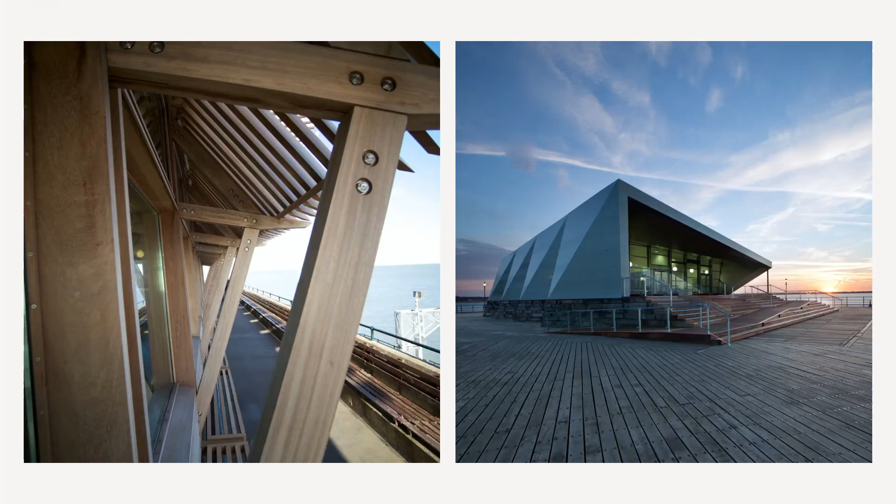This was labelled Project Innovation, and then I found there were two of my projects on the agenda. So I thought I would do a little preview of what those were.

So we can call it projects on piers. These are two piers on the coast of England. The one on the left is in Kent, and on the right is in Southend, which is actually on the south end of Essex, not the south end of England. Piers exist as a way of getting beyond the tide. It's quite tidal in the UK. In the case of Southend, there's a mile of mud in front of the coast at low tide.

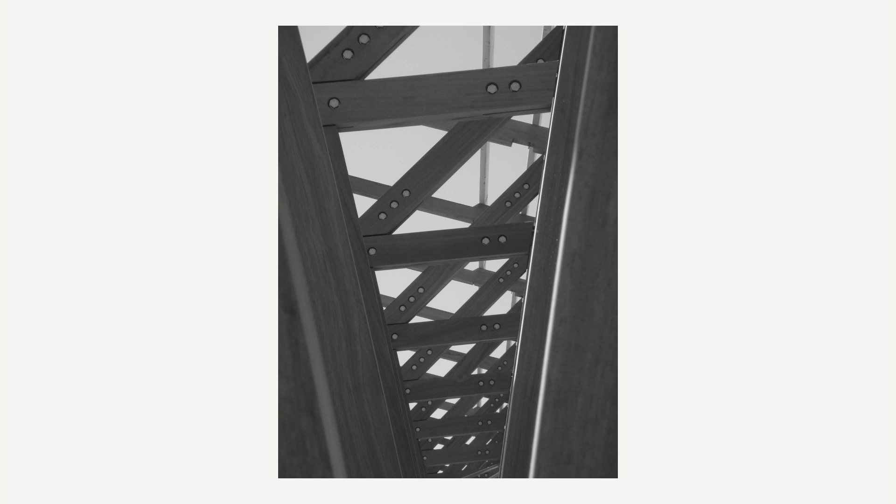What these give us is a challenge about how to build in the sea, but on these often rather rickety structures. This was done in the 1950s, and what that leads to is a different approach where the structure starts becoming really influential in the architecture and the method of construction.

This building was made in a hardwood called Iroko, and became a portal frame that defined the whole building. This is with an architect called Niall McLaughlin, who's based in London. But this idea of the architecture being generated by the structure, or the structure not really being structure but being part of the architecture, is something we're always trying to achieve on these architectural projects.

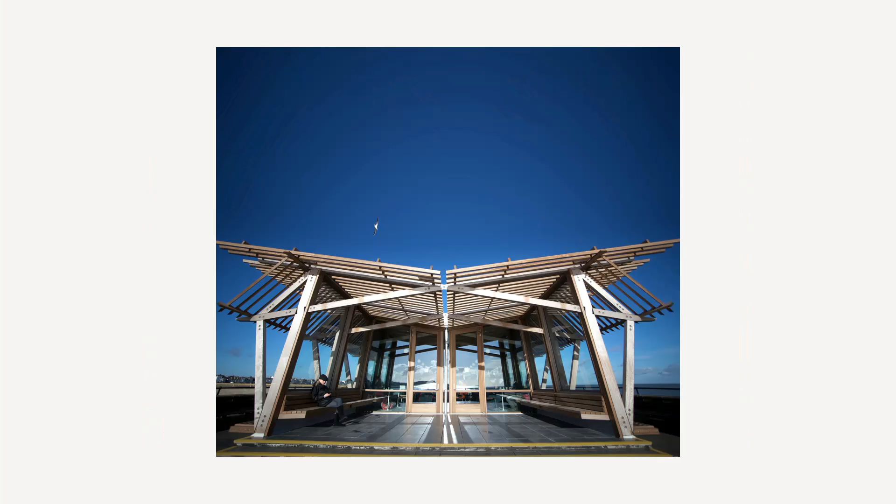Here we have the constraints that the material gives us writ large in the way the portal frame is designed. We have these short sticks of Iroko, which is the kind of lengths it's available in, and then stainless steel connections - this idea of triangles and stability and structural permanence in a harsh environment.

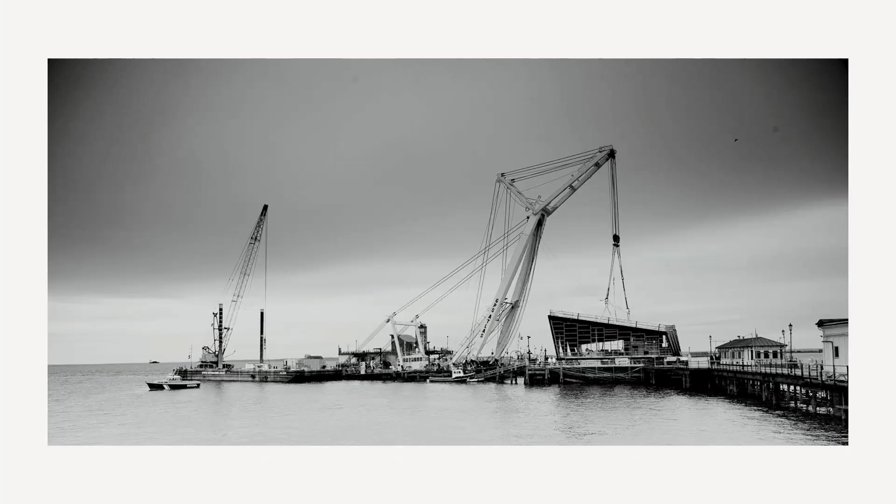So that was Deal Pier, and then back to Southend. That's the mile of mud, and the actual method - I've been talking to some people here involved in oil rigs, so I thought this was quite novel, building a building somewhere else and taking it to site.

That's what we did here. So you have this situation where your building is an object that you transport around, and you realise how much we're constrained by lorries and the sizes you can transport on the road. That didn't apply here, and we have this building that's 1 mile out to sea at high tide and in the mud at low tide.

This is a coastal project as well, and this was really one of the first projects I did about 20 years ago. We were on this 1994 to 2054 timeline, and you're 30 - I'm probably about halfway through my life in terms of that. I started working in '96, and in 2054 I'll be 80 if I make it that long.

But that way of staging your life and thinking about what you were doing in, say, 5-year stints - in this 5-year stint, we were thinking a lot about how to make things, and this was an earlier stage in digital design and the ability to model things.

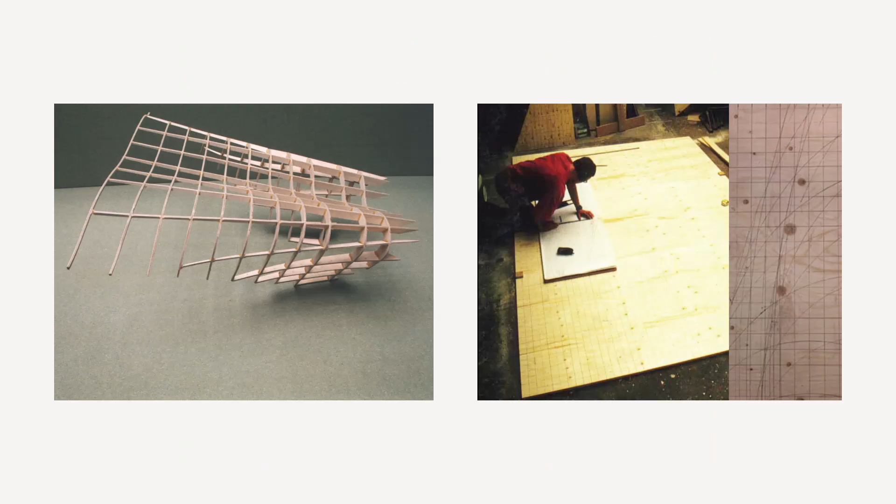So this bandstand came along, again with Niall McLaughlin, who we did the first cafe on the pier with. What we did here is really take responsibility for thinking about how something's made and built, exactly how it's done, and thinking like builders, which we do as engineers, but sometimes we need to do more.

This was, again, an era before CNC existed in the architecture engineering industry. So on the left is a model of a wooden framework. This canopy is seen as a boat and seen as something made of wood, and then skinned in fiberglass.

But how to do that - the person on the right is drawing curves over the surface of the plywood, and then they're actually cutting those out by hand on a jigsaw.

Time hasn't been kind to this. This was about 9 years ago when we thought about refurbishing it, but the builder who built it originally, Michael McHugh, he came with my drawings, which are 1 to 5 CAD drawings printed on 2 meter long rolls of drawing, with the precise coordinates of each bit of those curves.

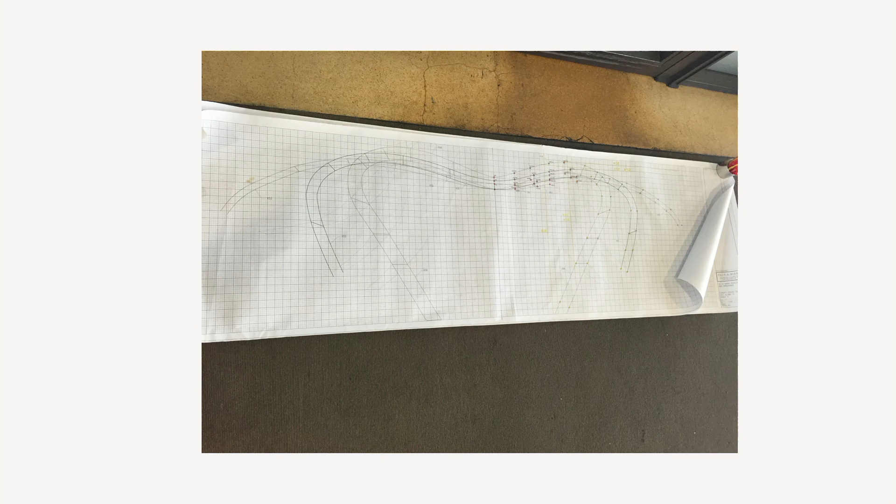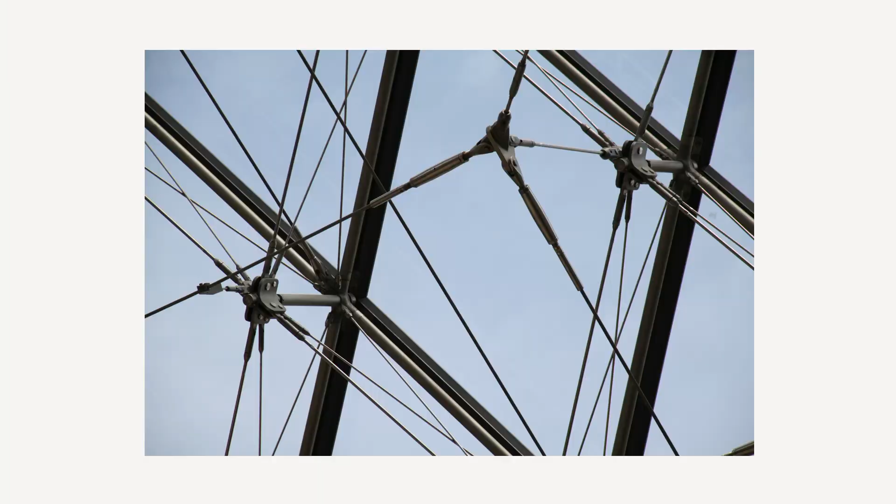I think for me the fascination was how this structure that looked so completely transparent could hold up all that glass and be such a monumental thing. So that idea of transparency and almost not being there as a structure has intrigued me ever since.

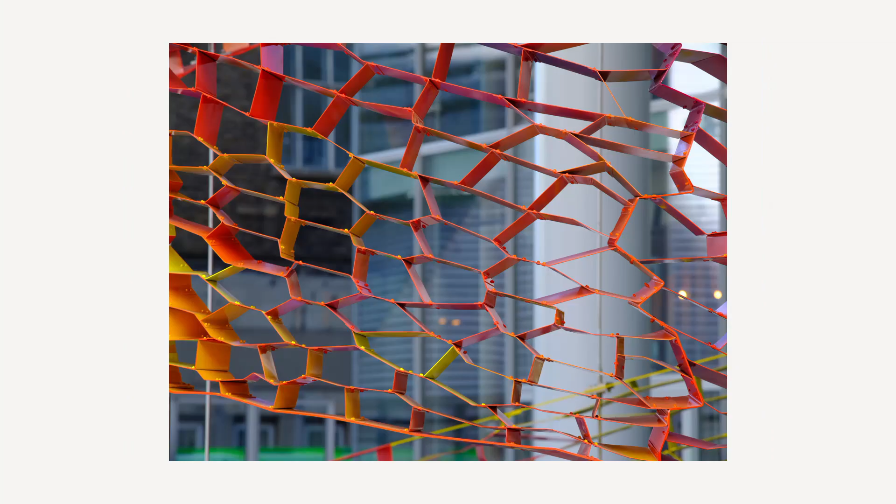So we've been doing this in artwork and other kinds of architecture, and that's a big driver in how I'm seeing the world in terms of designing buildings, but also designing a lot of artwork. In that, we're really making the artwork be the structure and be transparent, keeping that idea of extreme simplicity and not being heavy-handed as an engineer, but being in the background and making what's there structural.

So that idea of engineering - we're a technical profession, but we're also an artistic profession in some way. If you think of the engineering of art and rearrange those words, you have the art of engineering, and you realize the challenges we have are hugely creative and hugely appealing. And if we see it like that, we have this huge challenge that we've been talking about for the last 2 days. So that engineering of artwork is what I'll talk about in a couple of these projects.

I think I've got 3 to show you, maybe 4. This was the first one I did in Bristol. It's called a Millennium Beacon. It was done in 1999.

The idea here is literally like a giant trash can. It's lit from below, with an artist called Martin Richmond. But the idea, what I was trying to do here, is not have a column, but make the whole thing the column. It's made of very thin, perforated stainless steel, 1.5 mil thick. It makes a good seagull seat these days.

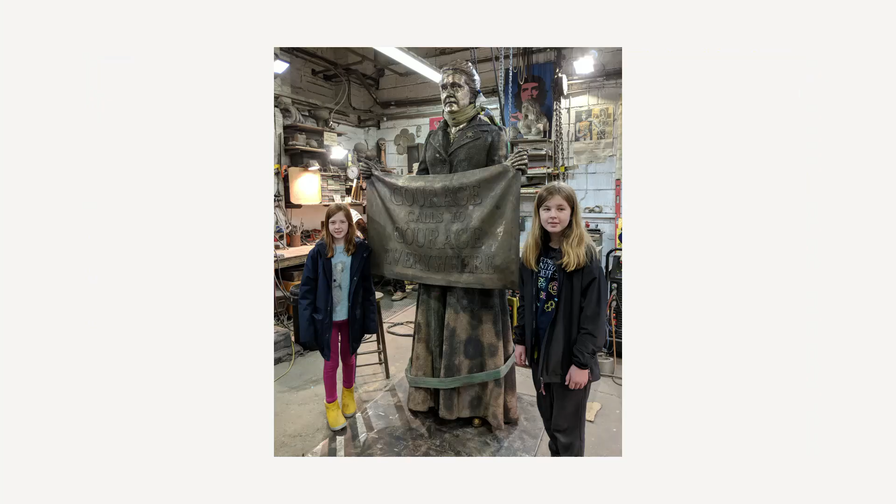Part of the artwork we do is statues, sometimes of footballers. This was a bit more serious - this is Millicent Fawcett, who, when this was erected in 2018, was the first female statue in Parliament Square in London. She was a suffragist, campaigned for women's suffrage, universal suffrage. And my kids have been long used to being dragged around art foundries and other kinds of fabrication shops, seeing things being made.

But in doing this, we're making this material structural. We're not imposing a structure on it. We're thinking about how she holds the banner, how we reinforce those fingers onto the banner, having stainless steel pins welded in. This approach is about trying not to be there—no artist wants you there as an engineer, they just need you. We have this role where we're the only real building professional necessary, and people can't do without us for safety.

This was back in Bristol, and more recently with Marc Quinn. This is the Colston plinth—Colston was a slave trader who was pulled off and thrown in the harbour. Marc Quinn reproduced this figure, a woman called Jen Reid, who stood on the plinth during a protest. It's only made of resin, but the base is 200 millimeters thick of steel plate, making it heavy enough to be stable without being fixed to the plinth, so we wouldn't be charged with criminal damage. It lasted a day before it was taken away.

So this idea of art is that often you're taking something that's low value junk and turning it into something precious through the thought you put into it. Some thoughts on that.

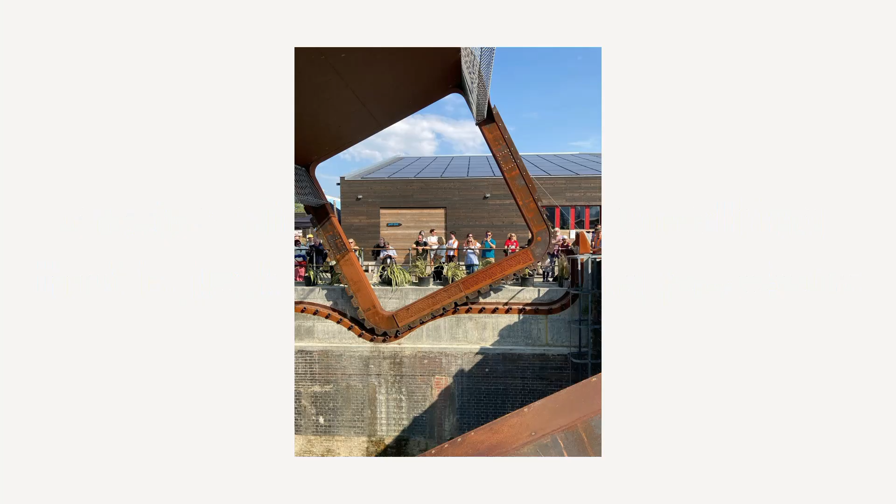So, I know we're not artists, but can we think of ourselves, and what we do, as turning the materials we work with into something precious—using them sparingly and thinking carefully about exactly how we place them and how we leave them in the world? It's something that challenges me all the time.

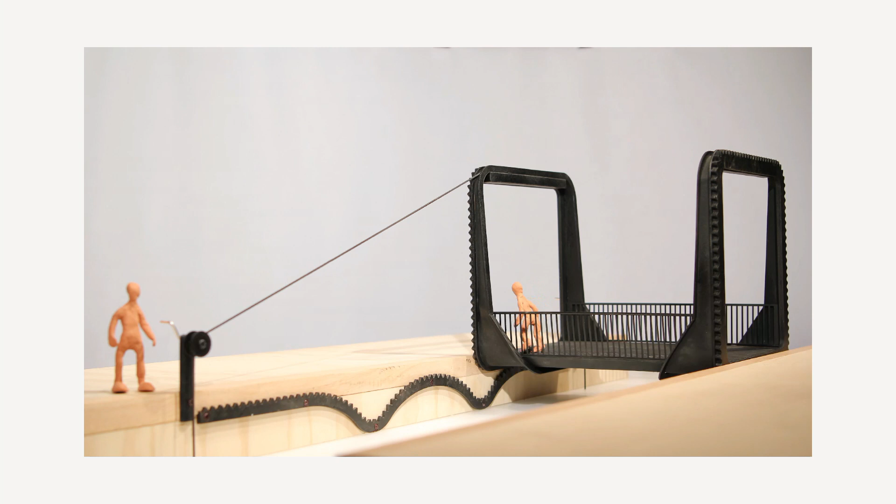So I'll do some projects. This is, I think, the one that got me the gig coming here—Rolling Bridge. Omar was a judge for the iStructE, and this won an iStructE award last year, I think. It works like this: you walk across, you say stop—there's a boat coming, wind the bridge please.

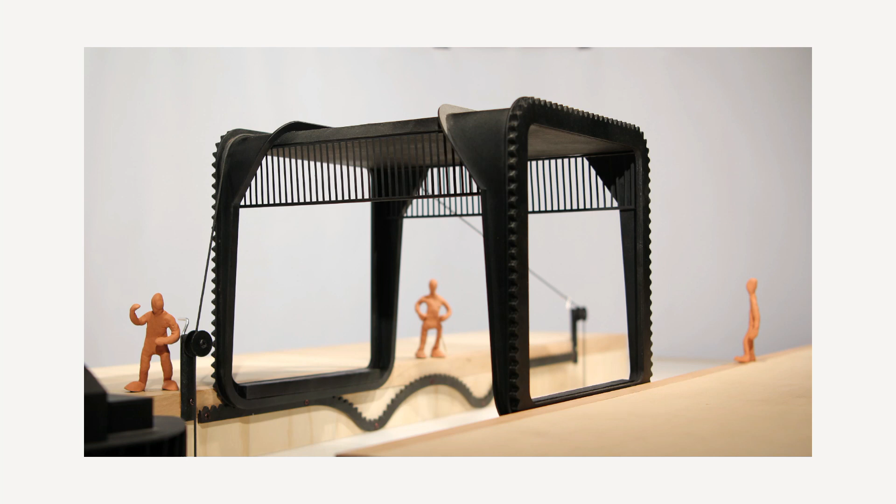It doesn't happen this quickly. Boat comes—very relaxed, boaters not rushing, it's a canal boat so nothing moves fast. Wave—you have to wave at people on boats, it's the law in the UK. There we go, and it's here. Have you seen EastEnders? This is my version of EastEnders.

The mouth of this dock is where our bridge is, and the idea emerged 10 years ago with an artist called Thomas Randall-Page, who I met at an opening of another art show—which shows you should always go to openings. He had this idea, manifested in that animation, of a bridge that rolled on a curved track to open, flipping over to allow a boat to go underneath.

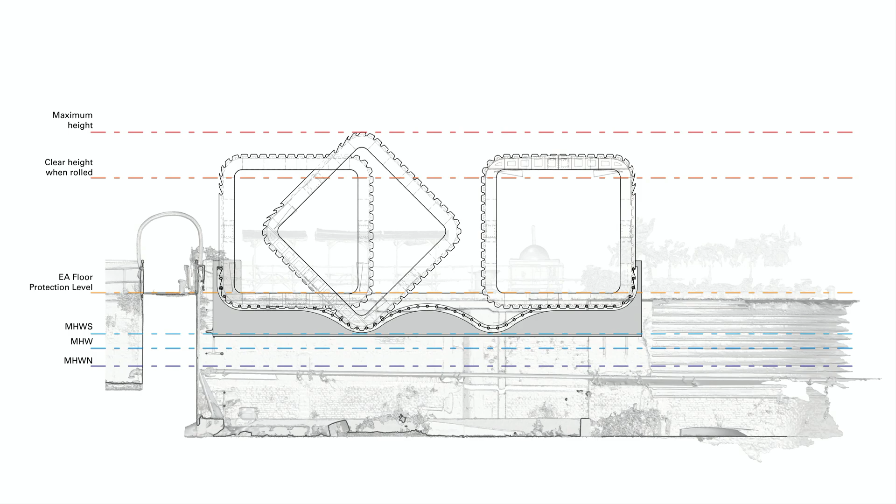That idea of knowing and not knowing yet is, I think, what we all take for granted perhaps, that we start something not quite knowing how we're going to finish it. And having that confidence to build and to not be freaked out by that.

And this maths that makes this bridge possible was developed by a guy called Stan Wagon, who's actually still alive. We did a podcast with him, and he actually wrote a paper about our bridge. It's one of those things where you have this idea in the 1960s, and then 50 years later, someone does something with it, other than make tricycle tracks.

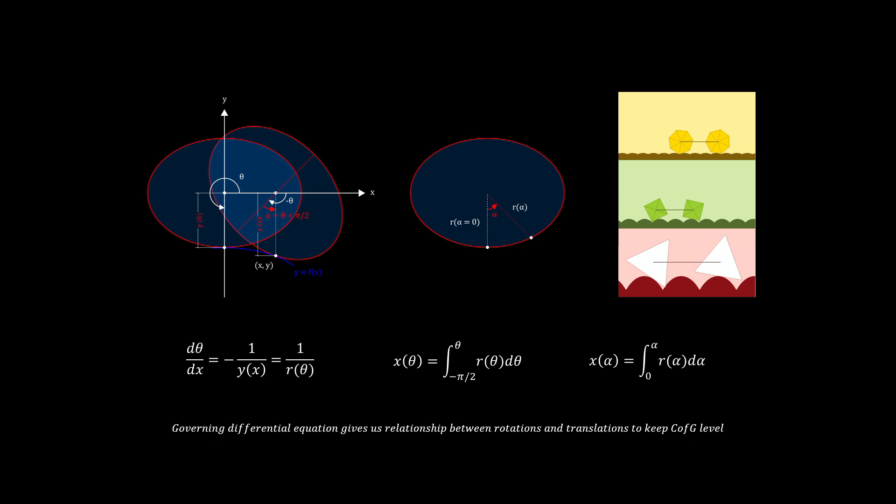So as I say, you can do it for different shapes - you always get a catenary. But what we had with our one was we had round corners, because the architect wanted to make it look gentler, which it does.

But this led to literally a Boxing Day maths nightmare, where they were cleaning up from Christmas dinner and had a message from the fabricator saying we can't make the length of the track match with the model that we have in the computer and the maths.

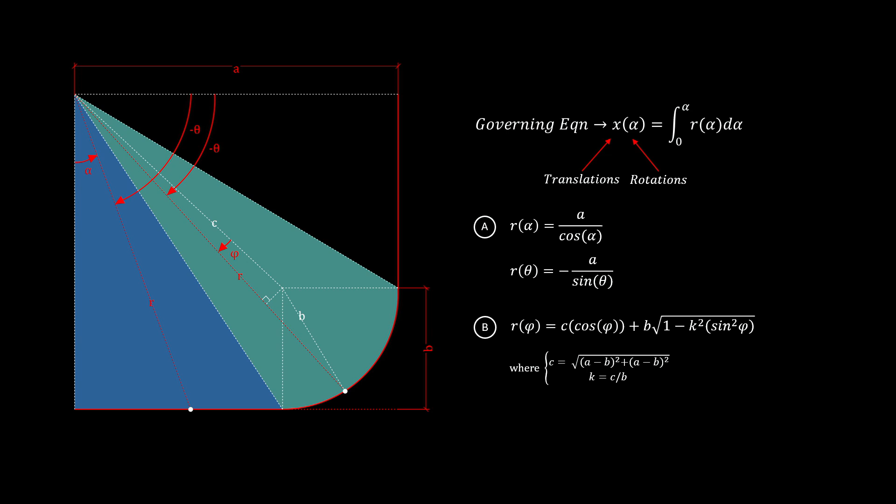What we hadn't realized is that in doing these corners, you have to have an indeterminate equation - an elliptical integral, which I'm not going to try to explain. You have a function that you can only iterate rather than get a complete result for. So luckily we have Grasshopper.

Grasshopper, for those less familiar with it, is a scripting software that goes with Rhino, which is a 3D modeling software. What's amazing now compared to when we started doing this, is that we have a common software, which seems to be Rhino, that most people who do this sort of work use, and the fabricators can understand. So we have one piece of software that's customizable, adaptable, and programmable by people.

So this is our bridge moving through space over this slightly modified catenary track. The modification is in the curved corner.

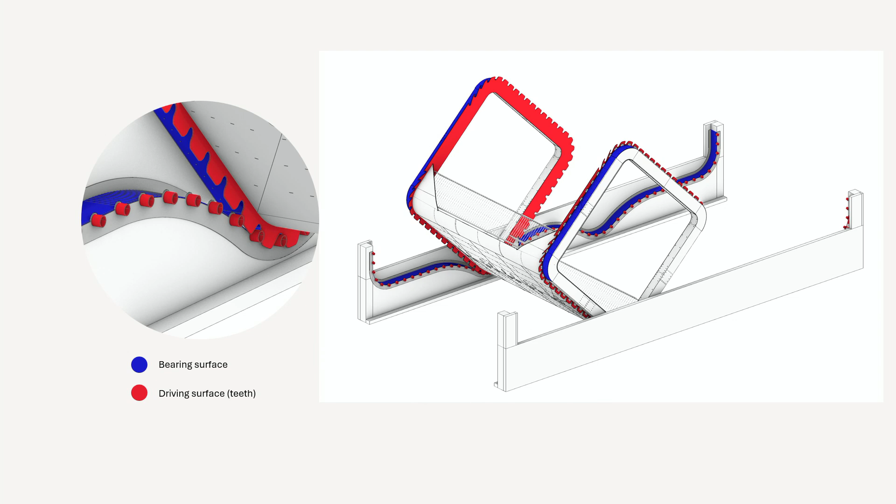And then you also realize that you don't know much about wheels and traction. So we had a mechanical engineer who helped us, and what he said was that the driving surface and the bearing surface, or the cog surface, have to be in the same plane, otherwise you get friction between the two. So we have the blue bearing surface and then the driving surface of the pegs, and they have to stand up so that the center of those circular pegs is at the same level as the track.

Once you've done all that, then there's more maths, and there's iterative GSA results. GSA is the analysis program we use for structural analysis, but also plugins to Grasshopper, the Rhino program - one called Karamba, so we can iterate lots and lots of angles of this bridge very quickly and work out what the relative forces are, how the bridge moves, so the center of gravity stays straight, so you're not lifting the bridge as it rolls along.

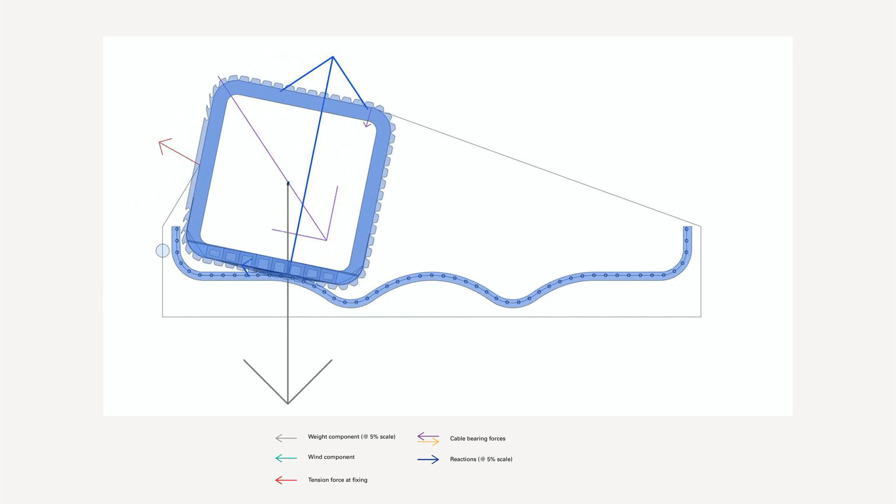But the actual friction, the impact of the wind on the deck when it's elevated, all of those kinds of things determine how hard it is to pull it, and how powerfully you need to pull the cable.

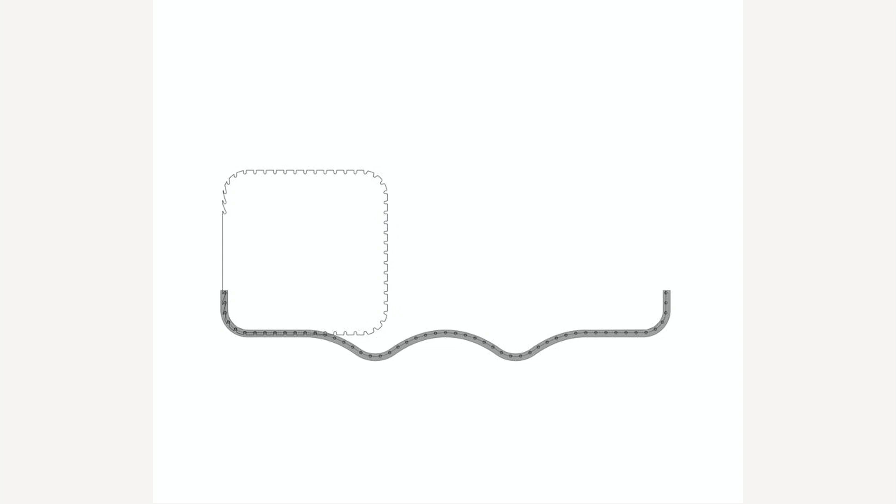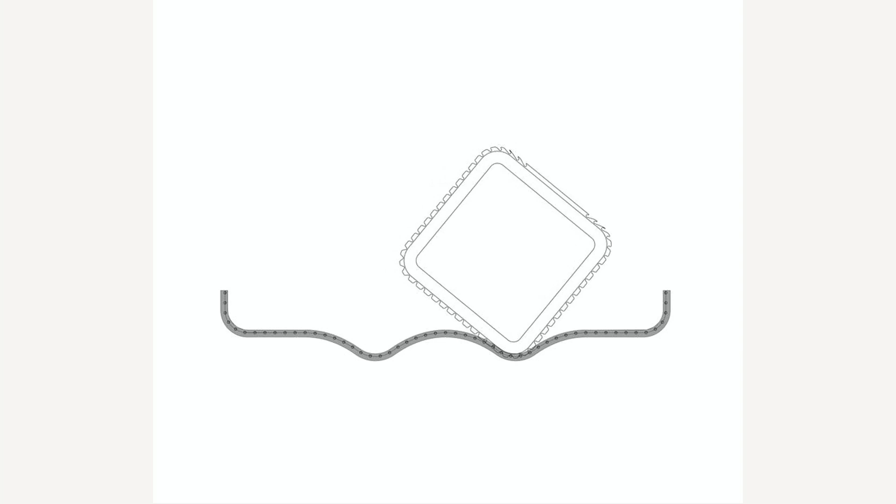So it's that, and then actually working out how do those cogs that we had on a very simple kind of tooth on the MDF model we made, how do those actually need to be? You end up having to iterate and twist your track over the perimeter teeth, and what you find is that they're all completely different depending on the angle that the bridge comes down onto the track. That process gives you this, which made a very good Christmas decoration last year on our Christmas card. But what you see is at the ends, the actual pegs come in at a very shallow angle of attack to the thing, whereas in the middle they're much more perpendicular.

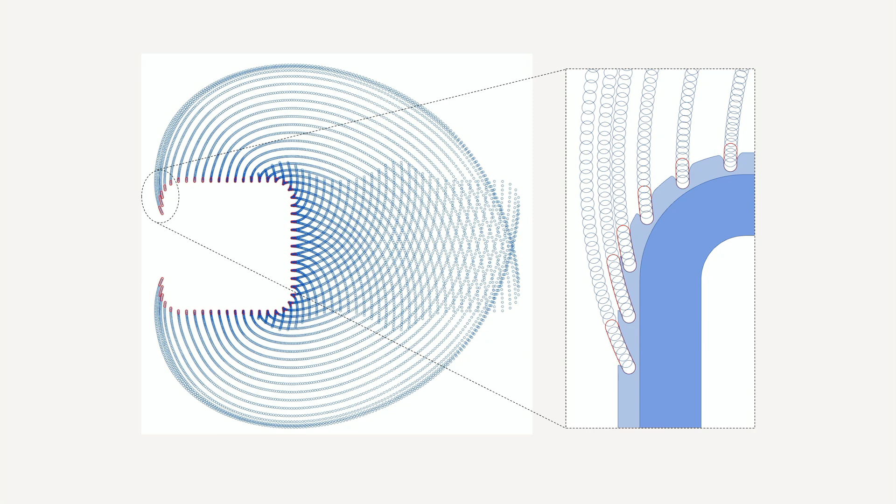So you have this very customized piece of steel, and then you can see here this is the bridge being built, and you can see how these things all line up. I mean, there's a whole lecture in this bridge about how things didn't quite line up, and did eventually.

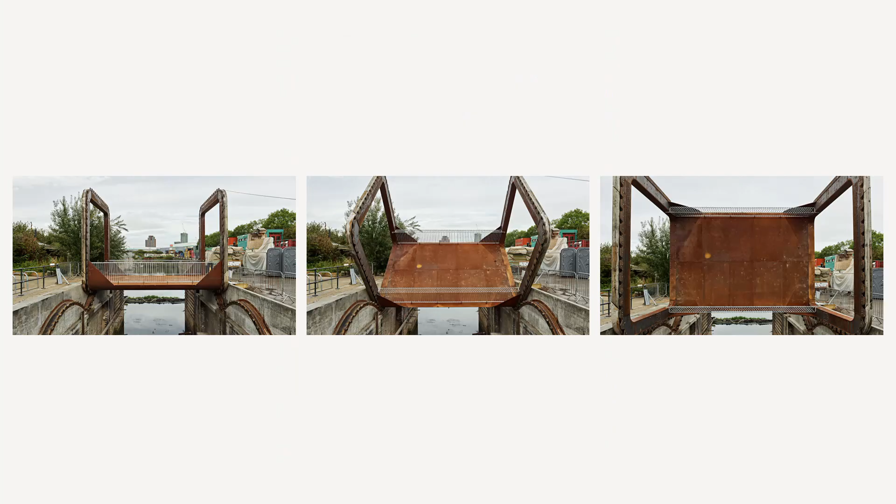But this idea of moving such a large object as a single thing - it weighs 13 tons, with the counterweight at the top, within the top of the portals - and then the deck being made absolutely as light as possible, so holes in all the stiffeners, just to balance the weight, so the centre of gravity is in the middle of the square.

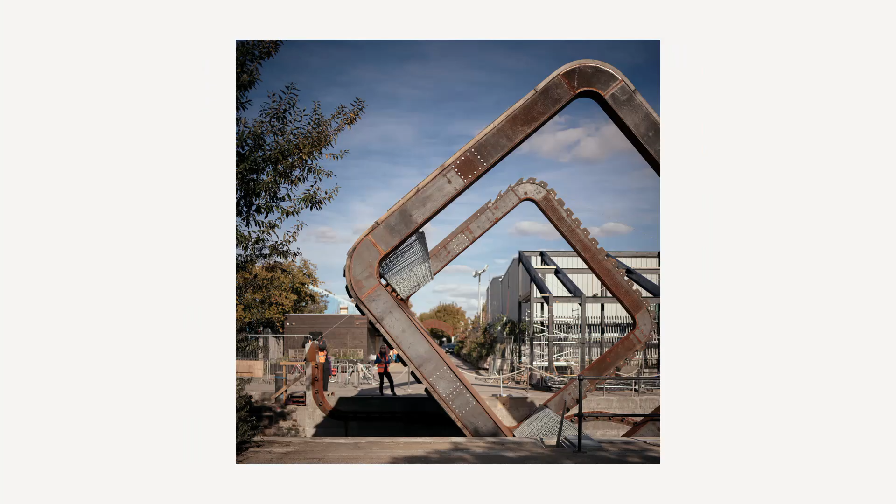So there's our weird teeth. It looks a bit like a sunken ship, you know, when you see a lurched, sort of tilting ship, and it makes you feel a bit ill. It does for me anyway.

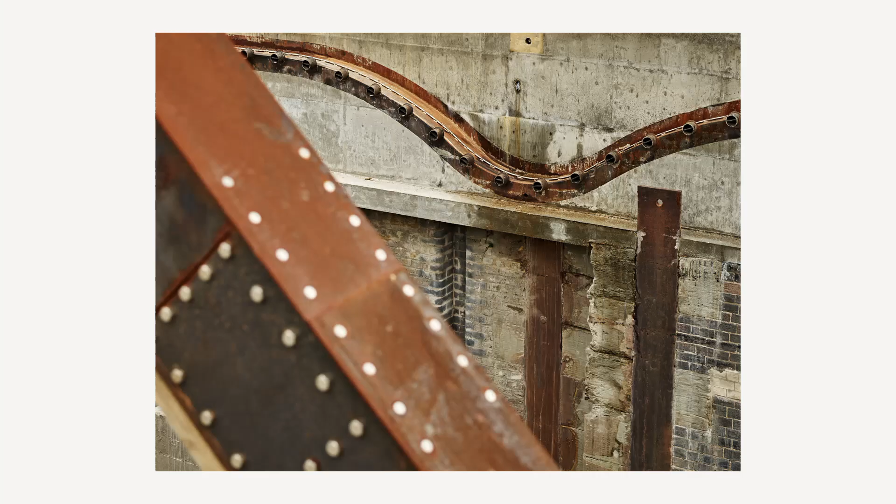So this thing moving - they move it once a week. It's been designed to move once a week for 120 years. In terms of fatigue cycles, it takes about 20 minutes to move it. One of these should be an animated GIF.

But this materiality, this sort of junk material - what was really nice was actually reusing the dock wall as a foundation. So we just cut out the bricks from the top of the dock wall and poured concrete around the steel track. So again, we're trying to reduce wear, never quite believing that it'll wear out, but just in case.

And it becomes a community event, and people are trained on how to wind the winch. You turn it. If you're me, you put your phone next to it to do a time lapse, and then your phone falls in the dock, never to be seen again.

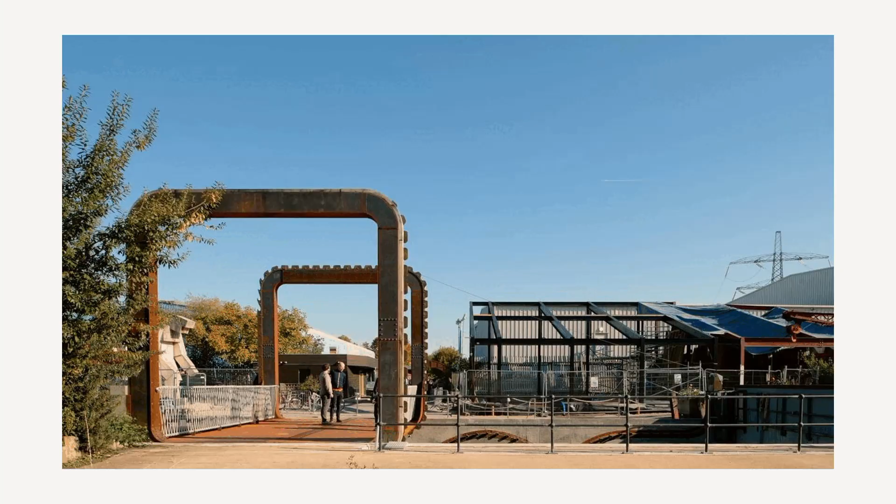It was expensive. That's actually Rob, one of the engineers on my team, who was kind of instrumental. This is the animated GIF - so all that in about 20 minutes.

But I think, what is the use of that? The use in some ways is it says so much about what we do, and there's different challenges at every step of the way that you can see in fabrication, in maths, in just physics. What we need to do is make people excited about doing what we do a lot more.

And how do you make something like that? Going back to the bandstand by the sea, and the idea of making it yourself and being the builder, using the technology we have these days, how can we build with this new idea of digital craftsmanship—this idea that you can craft stuff in a computer, in Rhino or whatever software you use, and become a maker, a virtual maker, and think of yourself as a craftsman, someone who has the skill to make what they think.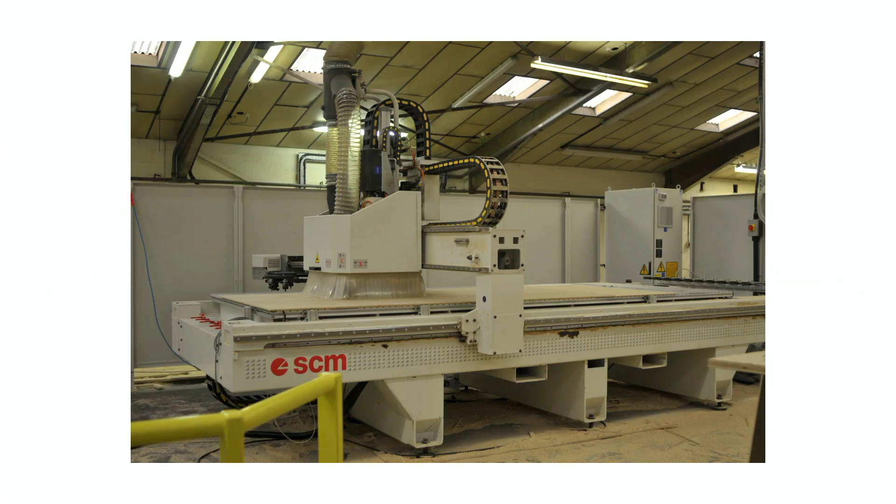So for doing this, you need software. Rhino—we did this in a piece of software called CATIA, way before Rhino came on board. It's a good job, because CATIA cost £35,000 for a seat, and Rhino cost about £1,000. So everything's much easier to do financially.

This was a second-hand CNC machine that the contractor bought from Italy, which kind of needed reprogramming. It used to literally go around in circles and set itself on fire if we gave it the wrong instructions, and then throw the piece of wood across the floor. But we kind of tamed it eventually.

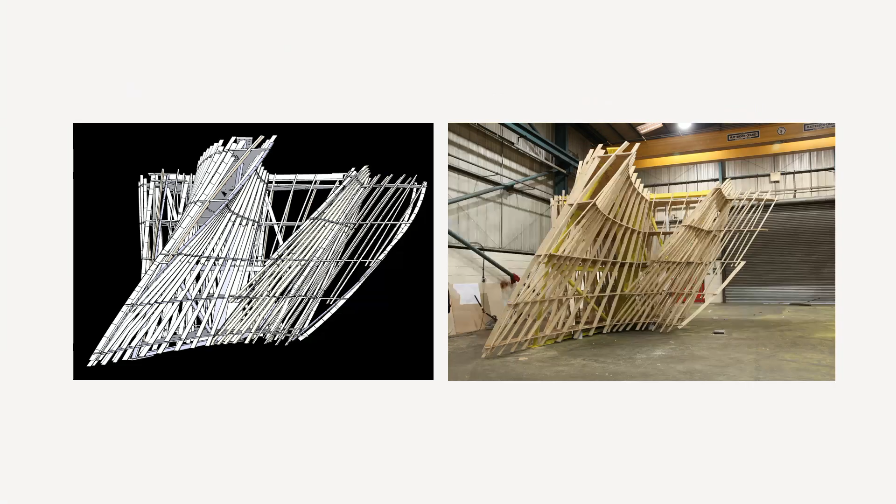And we got to this idea of digital craftsmanship where we made all the sections of that sculpture—there were 23 slices of it—made like a timber roof. But each part was unique.

So you have this crushing time burden of doing these projects. It is more efficient now, but this one we spent 12,000 hours working on, adding it all up. And you work out that gives you about 12 minutes per part in the sculpture to work on it—so you had to conceive it, analyze it, draw it, schedule it, specify it, all within that 12 minutes.

So you're obviously spreading things out, trying to automate the design process, trying to make as much automatic as possible—not producing drawings, but giving fabricators digital files and making them get used to that as an idea.

But also thinking about what you model as a piece of sheet material—in this case plywood and OSB—and then how do you go from a point on the surface and do a load path that takes you back to the ground eventually.

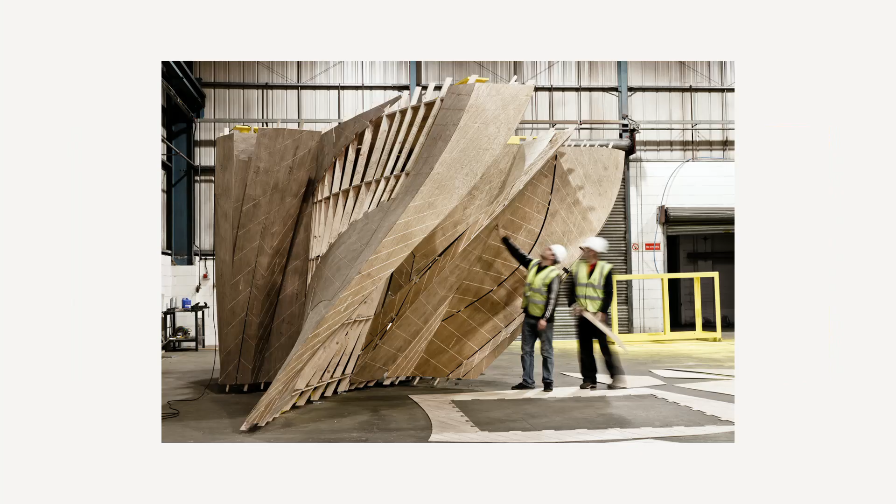So this really becomes craftsmanship in action, where people are making completely unique objects and assembling them. As well as designing a structure and a shape—because we had to design the shape to make everything fit inside it—you're also designing a kind of production process, thinking like the builder, thinking logistically, and thinking how do you give people that information, and how do you build information into the stuff you're making.

For example, it has direction arrows about which way is up. Those lines on the surface are so you curve along those lines—they're single curved surfaces. All that becomes hugely important.

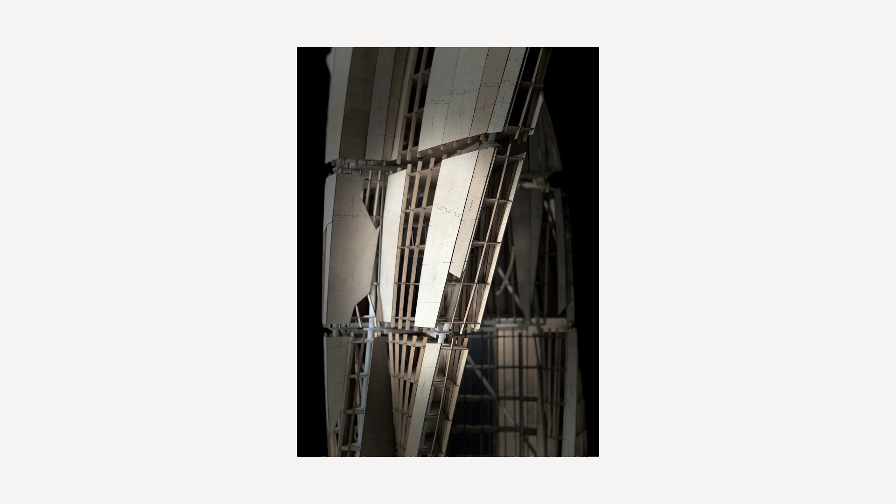And you realize, you've done all this work, and then you can actually build a model of it. We have a 1:18 scale model in the office, but it illustrates the value that we have in that information and how we try and treat it—we're kind of giving it away almost. If we were more canny, we might have our own machine and sell them the parts to build the sculpture. But these are long sleepless nights thinking about this stuff.

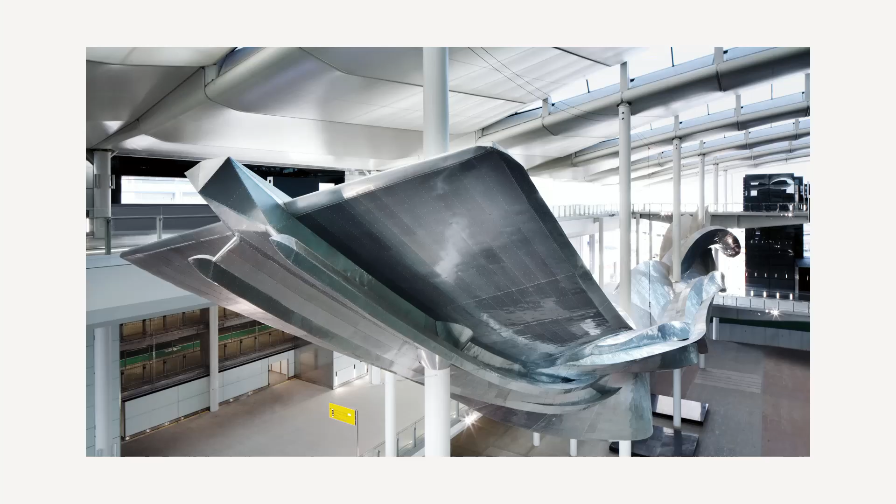So I won't dwell on the sculpture too much. It was finished in 2012. Next time you come through Heathrow, you'll see it—only if you go through Terminal 2. And that's the plane that you see coming out of that shape, clad in aluminium, with literally about 1 million rivets.

What that project gave us is this machine that the contractor had bought, the Angry CNC machine, and this material we'd been using, OSB. I don't know how popular it is in the Caribbean - it's called orientated strand board, made of small pieces of timber and recycled timber that's flaked and orientated in different orthogonal directions. It's kind of a humble, crappy material you'd use to patch up a broken window or a site hoarding. From that experience of using it and seeing its potential, we asked: what can we do with this humble material? How can we elevate its purpose and make architecture out of it, make enclosure?

It's actually quite regenerative. In England and Wales it's made in a plant in Scotland and a plant in Ireland, so we're not bringing it from Brazil like plywood - we're making it at home. It's got 6% resin, it's made of waste more or less. It's a good thing - how can we do that? How can we actually make that the load-bearing material in buildings?

This was a design exhibition earlier this year, during London Design Festival, where I was invited to contribute. So we put in a slab of OSB as this great thing that we've come to love. So I'm going to make you love it now.

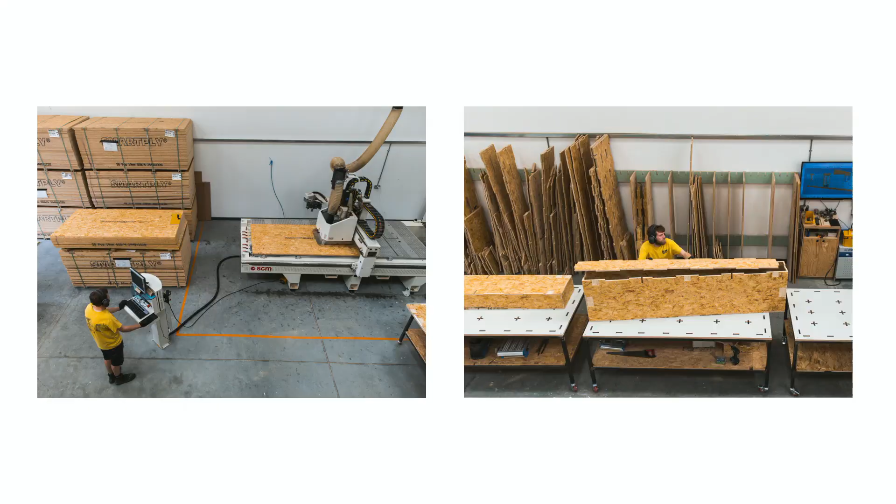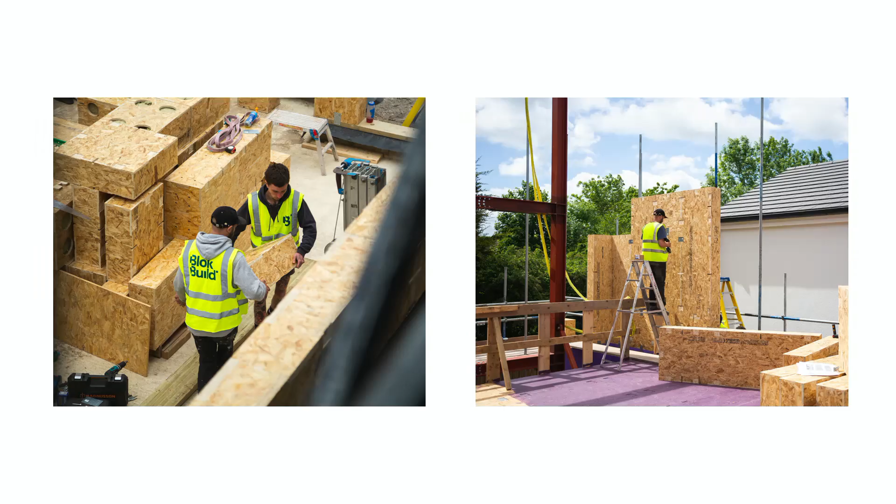That's the machine, the Italian CNC machine - they've just bought another one. This process of making boxes, the company that got founded out of this is called Blok Build, and they build blocks of different shapes of OSB and stack them up in walls. What it doesn't have is softwood inside it - the entire box is structural, everything you see, and it contains the insulation and quite a lot of system thinking as well.

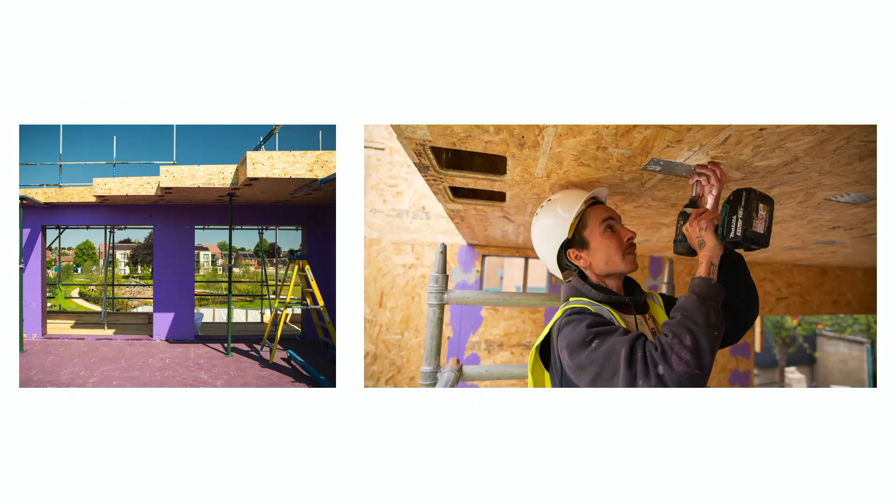So we did walls first, and then we thought, could we do slabs? Could we do floors in the same material? We came up with this idea that if we alternated those boxes in plan and staggered them, we could make an overlapping box and transfer bending moment and torsion between each box, so each box is torsionally stiff and also stiff in bending.

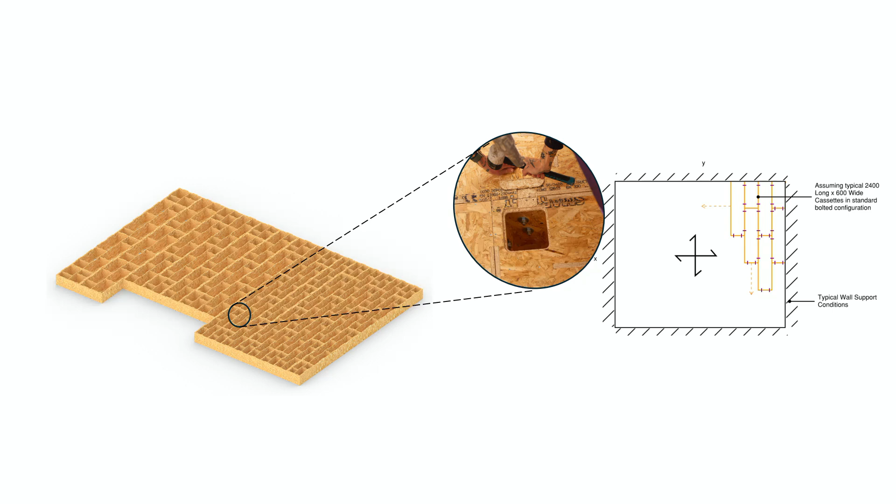This was a prototype floor we did for one of the owners of the company. This is our 3D model, using Rhino, Grasshopper, and GSA coming together to give us analysis capability. The overlap means the force basically jumps from one box to the other, one line of boxes to the other.

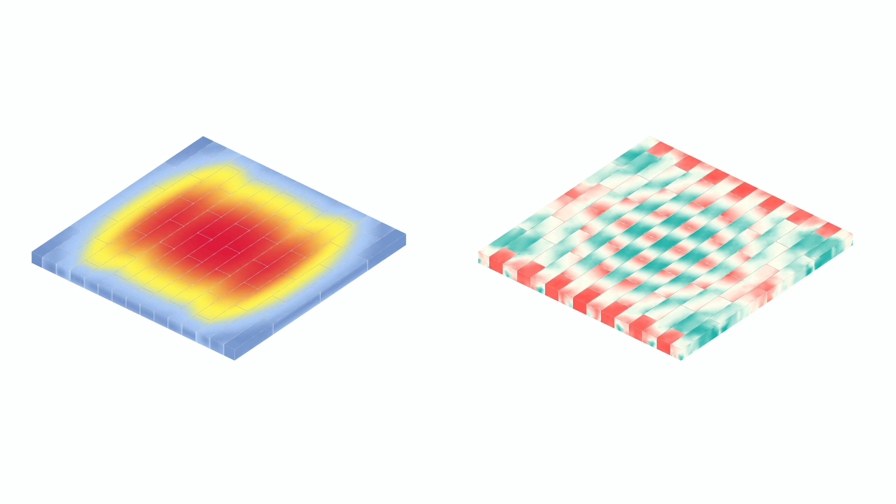We have these analysis models of the wooden boxes, and you realize they actually span two ways, so the torsion aspect works for you on a floor panel as well - you get about a 40% increase from the two-way spanning action than just one way.

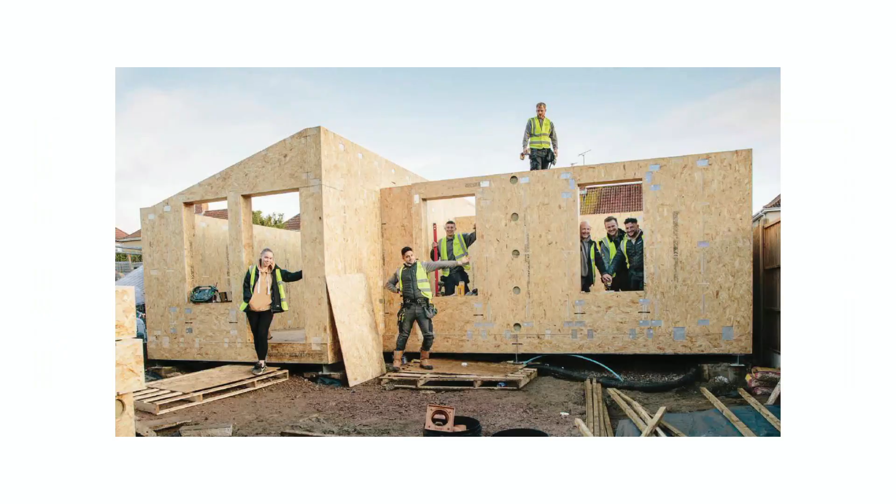So where's that taken us? Really, from a sculpture to a few experimental buildings, to what we've been talking about - social value. This is a housing estate in Bristol, where there are very big gardens and very big families in quite small houses. The idea has been to build extra residential units for people in those families in the big back gardens, but not just import it from somewhere else - we're actually bringing the skills, building the skills in the area, bringing the machines in. There's another machine behind this chap, and there's a local micro factory making these houses.

And then the system increases as well - what you do, and all the software and thinking around it. On the left is a basic model in Rhino, and there's increasing sophistication in scripted, programmed methods to take those surfaces and add all the detail, add all the notches, add the numbers, add all the information onto the board, from left to right there.

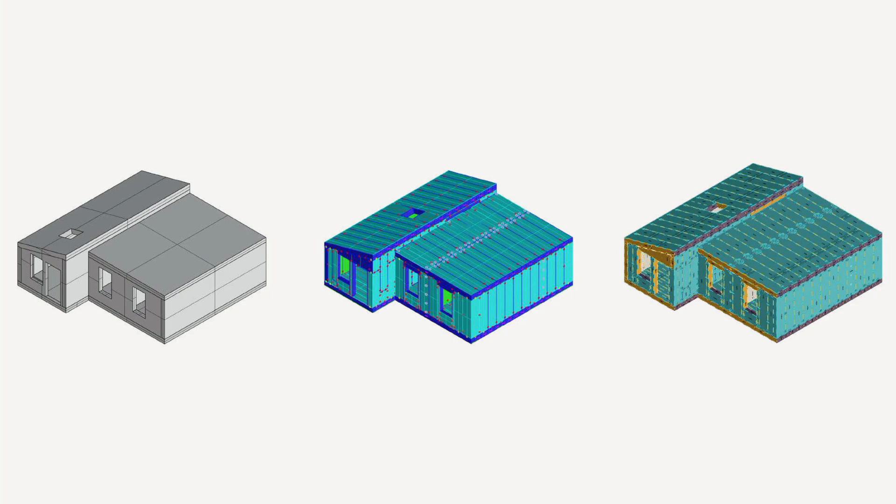That system is really - if it wasn't for the system, the thing wouldn't work. If it wasn't for the structure, it wouldn't work either. So they all come together. You think about shifting from engineering the whole thing to engineering the whole system, and really that lesson with the complicated sculpture in the airport forced us to rationalize our time and think about how you produce information, how others produce it, and how much you can automate to avoid mistakes.

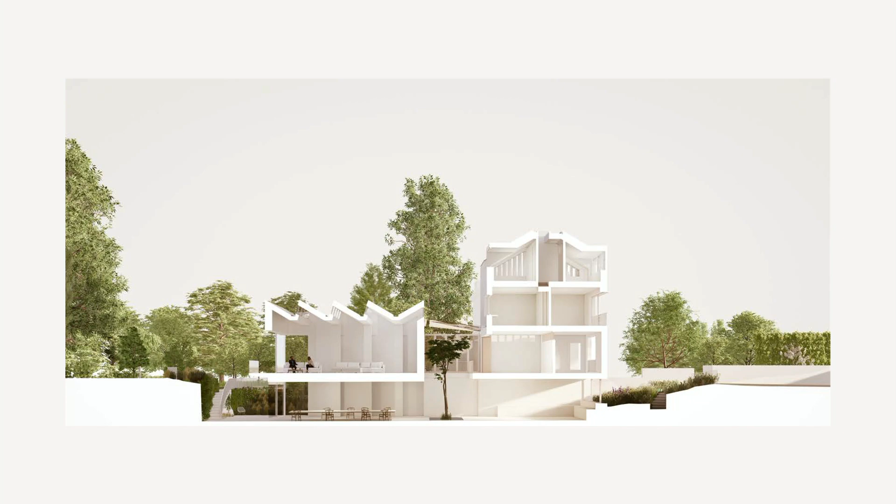It's been a key thing. This is a house for a philanthropist, we'll call it, in London. We managed to persuade a very rich individual to build his entire house out of our OSB panels.

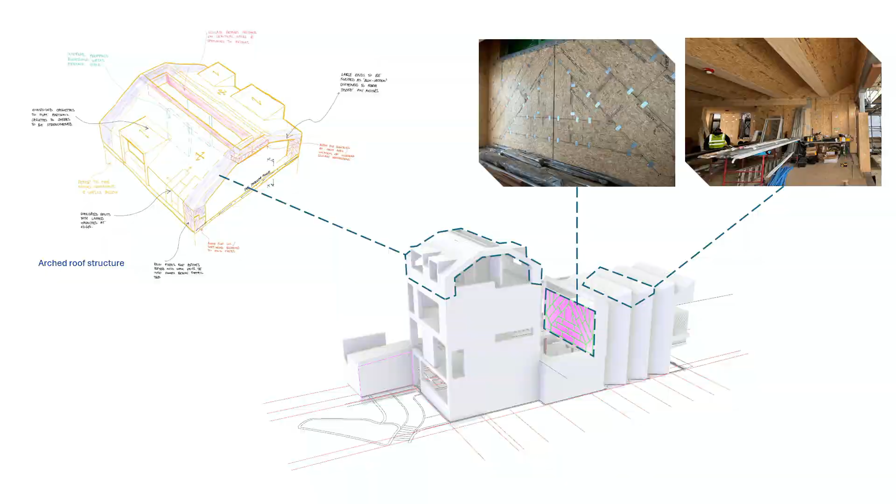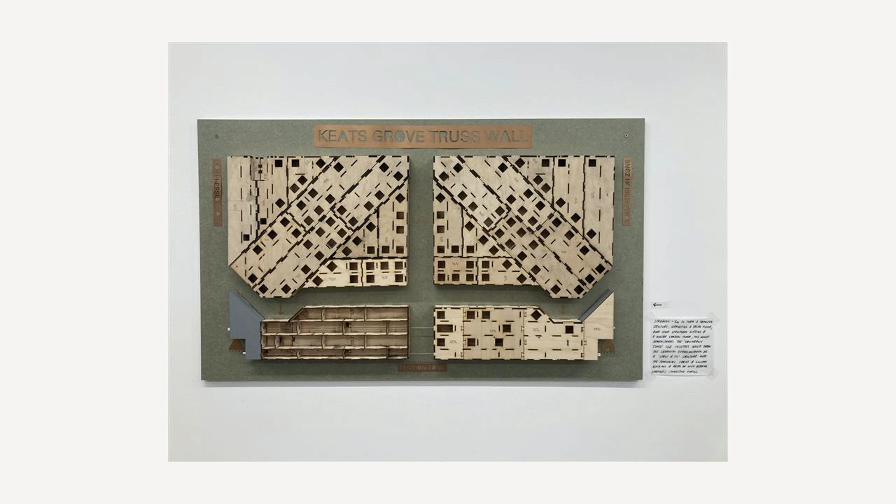Each project is an R&D project in a way. So here we have what we call the truss wall, which holds £250,000 worth of glass, just where it's pink in the middle, and more overlapping details using it with glulam, but actually taking technology from other sides of engineering. So post-tensioning - this is the truss wall where the bottom components are post-tensioned together, and then effectively arches over the top with a steel bar that runs down the middle. Extremely strong, 8 meter deep, 10 meter span beam.

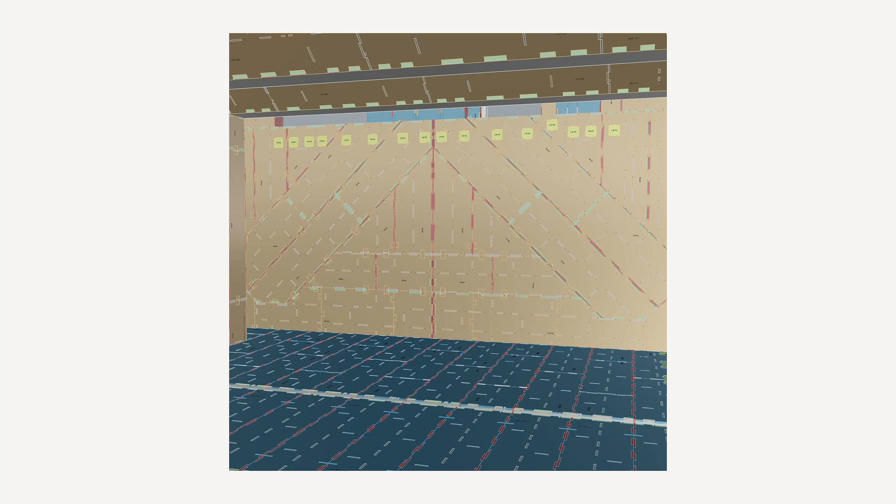With a model, of course, we have a model maker in-house, which is really good. And with that system of producing the information and actually manifesting it on site - access to these tendons, and this idea that we have a real privilege as engineers that we can authorize materials. We can say that is okay to use. We understand it. We can guarantee its performance. We can test it, we can study it, we can effectively authorize it to be used.

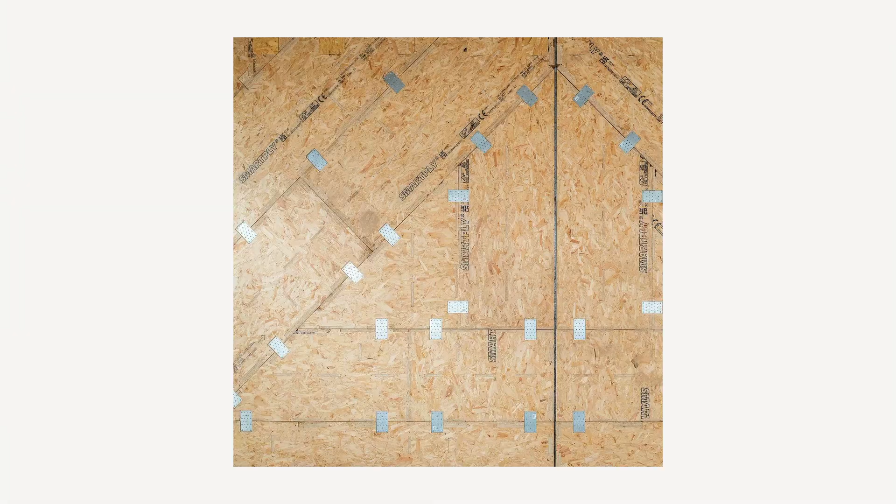So we ought to remember that more, that we ought to think - well, as they've done in glass, as has been done with bamboo by Neil. Lots of examples.

So there it is, some final pictures. These are some of the buildings we've done. Each one sort of slightly developed from the previous, but we then start to think about architecture for other species.

And what we have at home is this thing called biodiversity net gain credits. So every time you develop a site, you have to add 10% more biodiverse land, but certain types of ecosystem that exist on the site at the time have to be maintained for 30 years. So this is a big kind of growth opportunity if you have a derelict farm and you want to make it into a rewilded haven for animals.

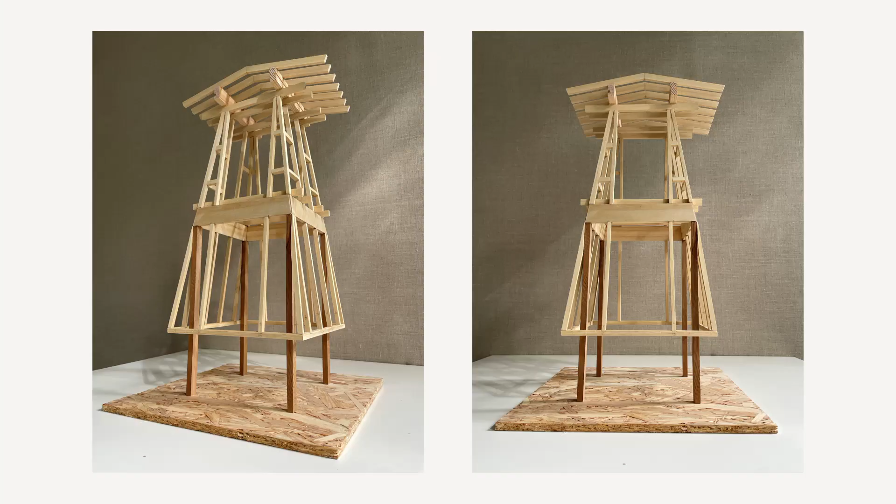This came with working with a firm called habi-sabi, and thinking about structures for bats, birds, voles, mice - how do you make a thing that can actually be functional and profitable through these biodiversity net gain credits that people need to acquire? And then how can those sort of tie in with that idea of the OSB construction? The fact that it's hollow means that animals can live inside those hollow boxes.

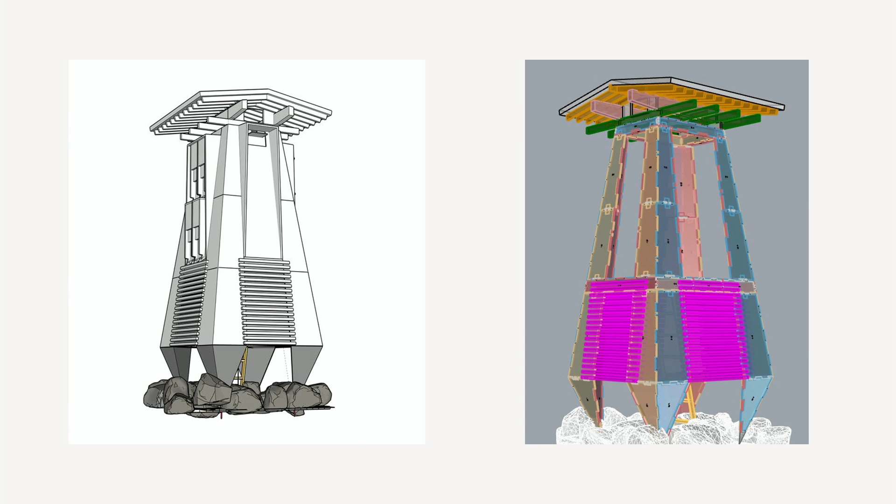So this is a project we're currently doing called a perchoir, which is a French word for bird perch. The thing is integrated, so now we can put these inside those units, inside the building - not that our client for the house would have had it, because he's not that creative.

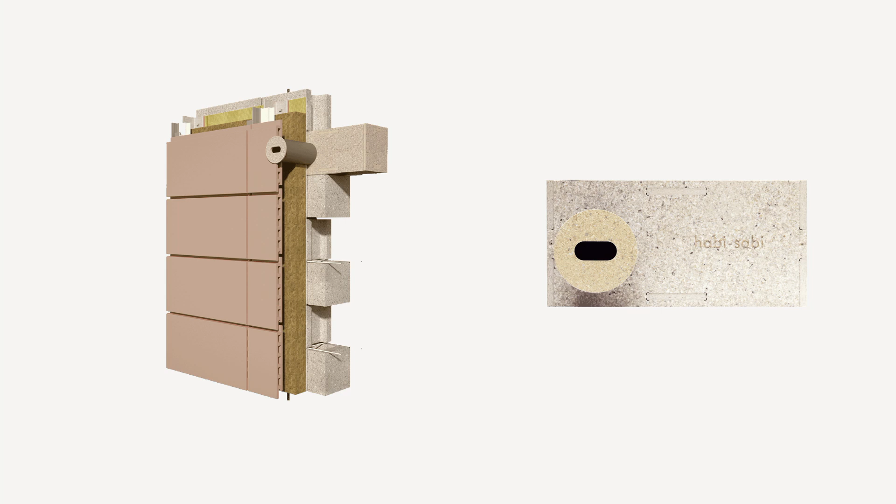But anyway, okay, I think this is the final thing, really. This is an artwork project which hasn't been published before, and it's only just been unveiled in London. It kind of takes this idea of trying not to design structures quite far, and really working with what you have. This is a Japanese artist, she's called Yayoi Kusama.

This must have been in the 60s. She looks like this now. She's into pumpkins and polka dots, and lives in a psychiatric hospital in Tokyo. I've never met her, but apparently she's very nice. And we got contacted by her...

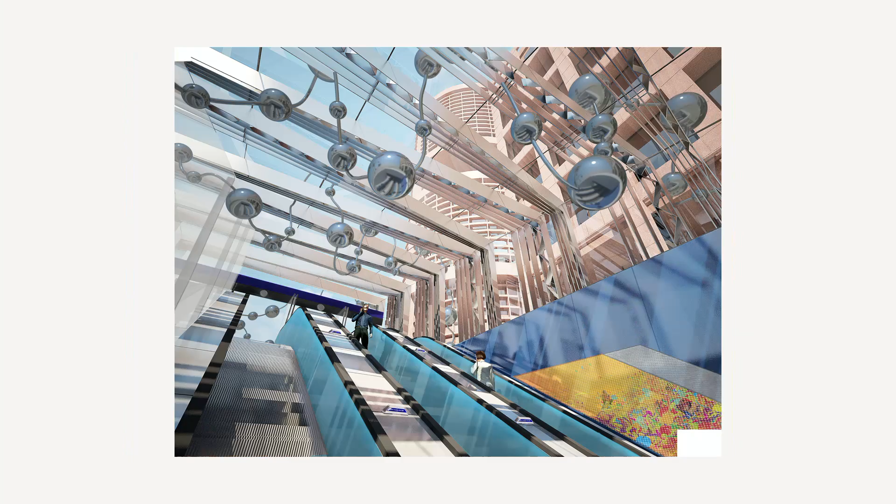well, not really by her, but it was to do with this, which is Crossrail. It was called - it's now called the Elizabeth line, or the Lizzie line, or the Liz line, depending on how you like to shorten Elizabeth. It's a railway line which mostly uses existing track outside London, and then there's a new tunnel, or several new tunnels, that connect Paddington in West London through to the east. So beyond Stratford it goes up to Essex and down to bits of Kent, down to Woolwich, and also a spur down to Heathrow. This has been in our lives in London for many years.

The route's been reserved ever since I've been working. You couldn't put piles in certain areas because of Crossrail, and we've managed to design 3 major artworks. Each station had an artwork, so we've managed to bag 3 of them, which has been great.

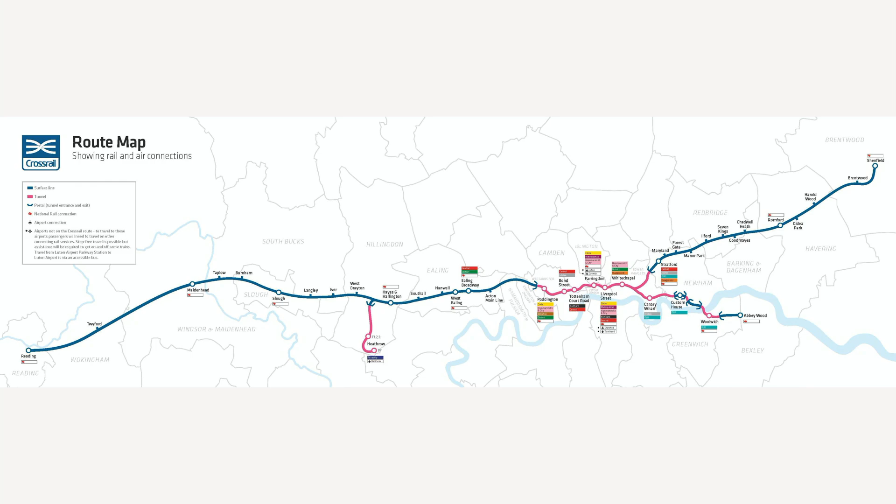And this is a sneak preview of the one in Liverpool Street, which is the main station that goes out to Essex and Suffolk. So how do you make a really sinuous sculpture full of stainless steel balls, Tim's shiny balls, as they're now known, in the street in London?

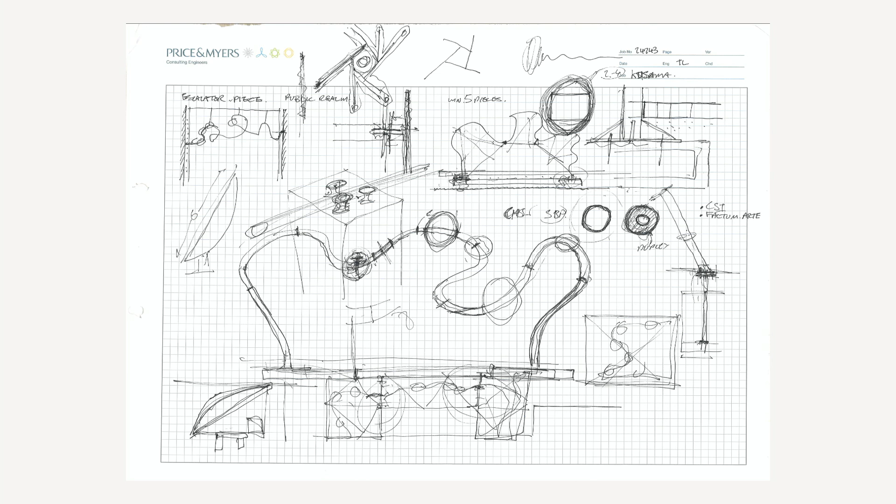And how do you, when you have that as a maquette, this arrived from Japan in a box. Well, actually, about 6 of them arrived. We weren't even sure, as they came out of the box, they were the right shape. So this is Will, who worked on the project. We thought the best thing we could do is just try taking pictures of what we had and elevating them at 90 degrees with a telephoto lens, so we didn't get too much parallax, and try and get an initial thought on what these shapes are, how you arrange these balls.

And the sculpture is all about the spheres. It's not about the arch that links them. She doesn't want an arch. She doesn't want anything to be there apart from the spheres, the polka dots, and actually having that in your mind at all times.

So that's some models we did, and then some early, once we would model that in Rhino, experimenting with density, because even then they weren't quite sure exactly how it should be. So then you start to experiment with density of the spheres, the size of the spheres.

If you Google Shiny Ball Co., you'll find a Chinese company that makes shiny balls in stainless steel. They're quite interesting. They're made like dustbins with cone tops and bottoms, and then they explode water inside them, and that deforms them into a sphere.

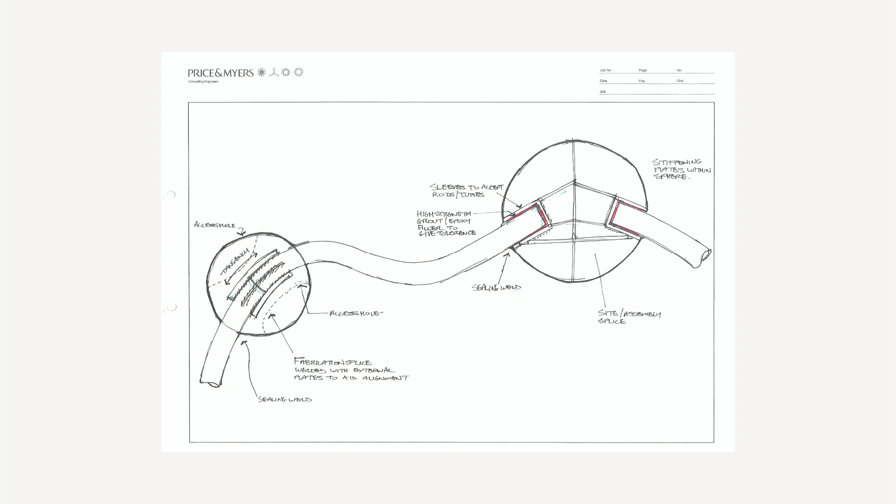How you join it, how you actually, do you use each one as a splice? Do you try and weld through? All these kind of unknowns, and how thin can that tube be? And how much will it just move around like a crazy box of frogs once it's been built? It doesn't help that the tube station is directly underneath, and there's hardly any space for foundations.

And then you realize you have to design it for 150 kilonewton impact load. So you have to have solid steel bar, 160 mil diameter, in the most rigid foundation you can think of.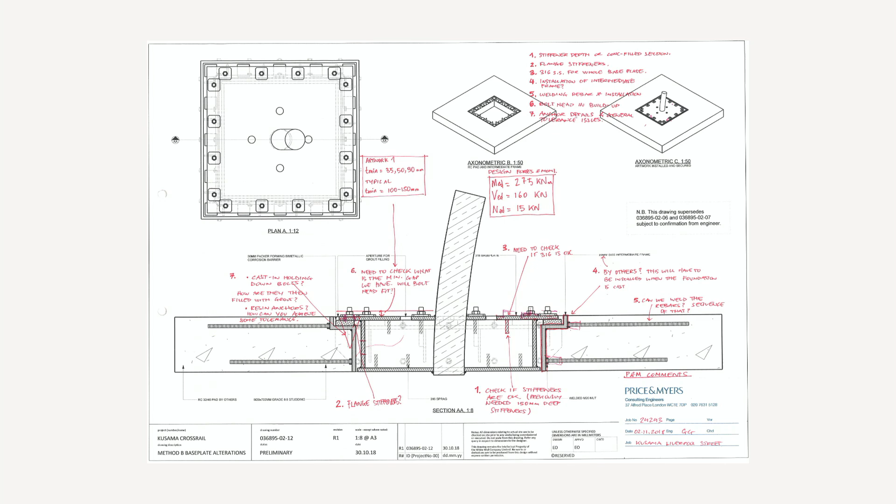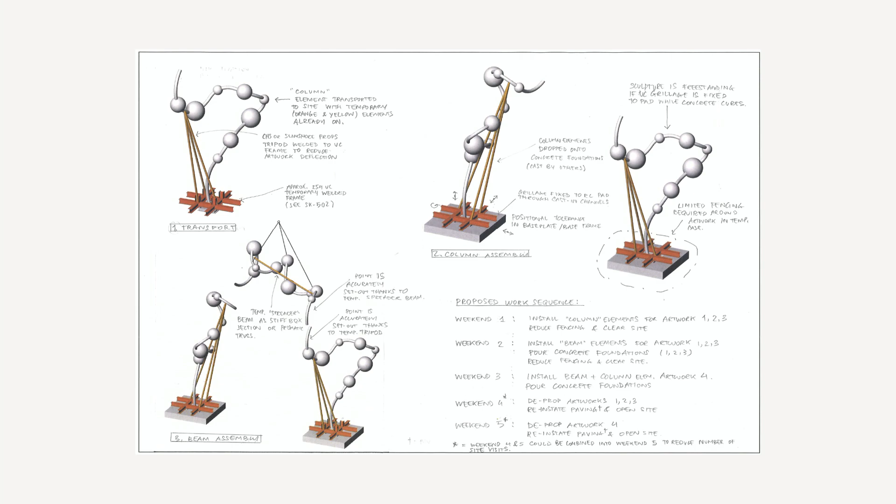So that was that. And how do you do the temporary works? How does it stay in roughly the right shape in between the factory and coming to site? How do you avoid all the services that are already there? That was quite a logistical challenge for somebody. And then how do you stop it moving?

So this thing, when you go there and see it on a windy day, it's really uncanny because it doesn't move at all. And you would expect it to be shaking everywhere and be like a non-stop thing because it is very, very slender. And the way we did that was by thinking we ought to get some of those sloshing dampers.

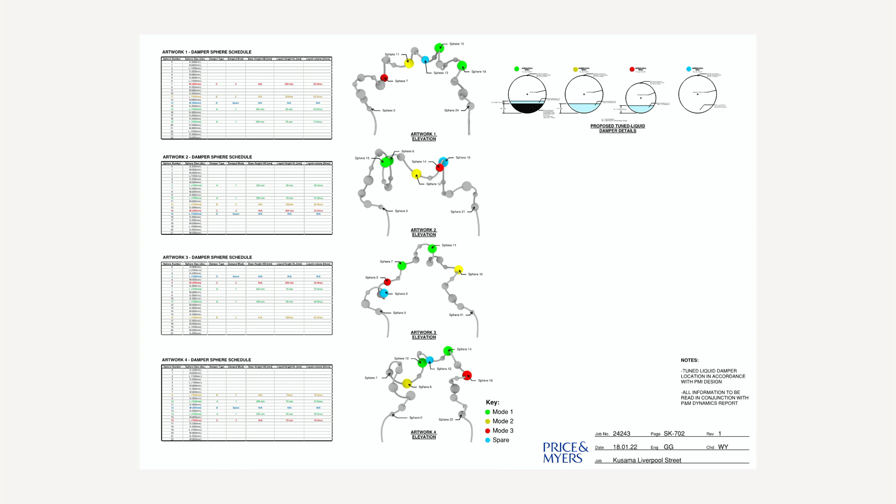And because you have these ready-made spheres that look like wine goblets, he's extremely happy because we've got somewhere to hide the sloshing damper that's within our sculpture and is unnoticed. So very, very low tech.

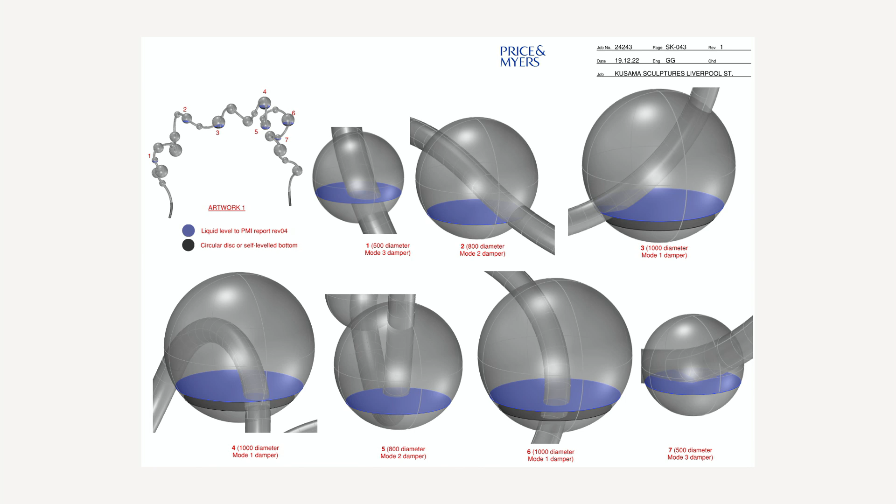At the peaks of the, you call them antinodes, aren't they? The peaks of vibration in the mode shape. So different peaks of different mode shapes have a hole in the top and either a plate or just the bottom of the sphere, and they're filled with ethylene glycol and water and sealed up. And that completely, amazingly cuts out all vibration. It's incredible. Before these were filled, the whole thing was completely alive, and then these things cut it dead.

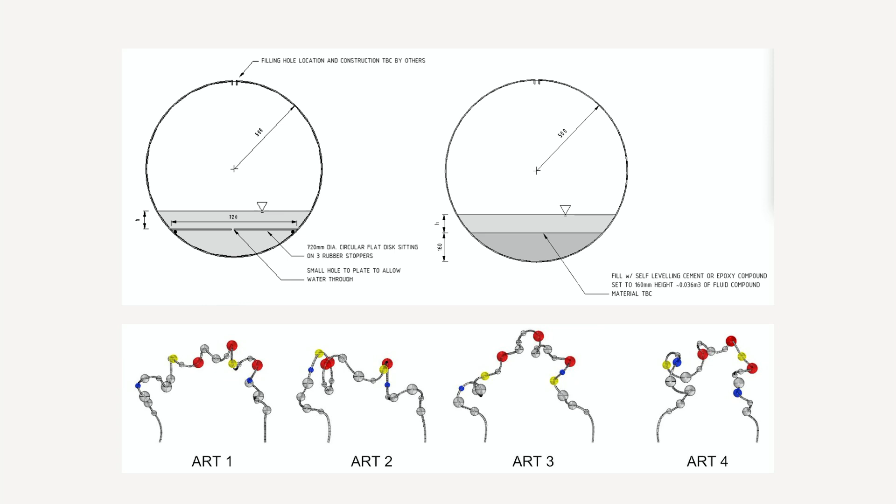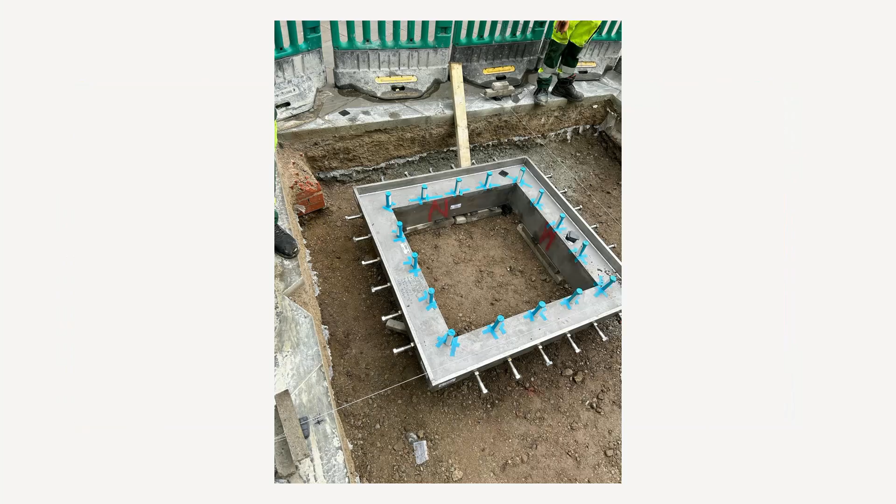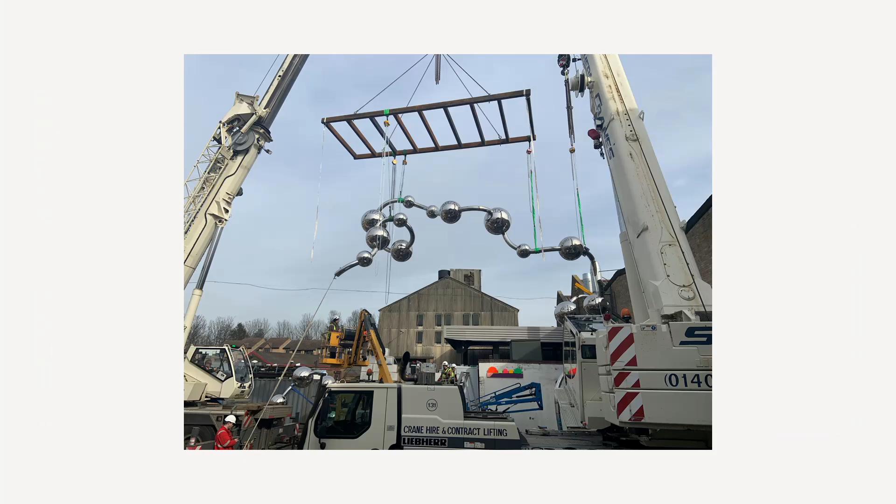So this sort of real pleasure in almost doing nothing to achieve so much. We're not allowed to show you making it, we're not allowed to show pictures of it being made - so here's some pictures of it being made. This will get recorded. I think Kusama Studio had this thing where they only want to see the finished object ever, which is a real shame because there's so much ingenuity in building these things, and how you lift such a wiggly, spring-shaped object.

But yeah, it's there, and it's amazing because you do actually go down the road, and it feels like you're surrounded by spheres, not surrounded by steel tubes, even though they're reasonably thick and thicker than those original wire pieces.

Next time you go, check it out. Part of the Elizabeth line, which means you can go straight from Heathrow, come out here, and you'll be very happy.

Engineering of art - I'm trying to wrap up the art of engineering. We're being creative, we all know about this, we've talked about it a lot. We think about, are we doing frivolous things like art, how are we contributing to this, how is what we do, what's mine to do? There's a quote someone gave me: what's my personal thing, how am I going to do this? If we all did something, we might get somewhere.

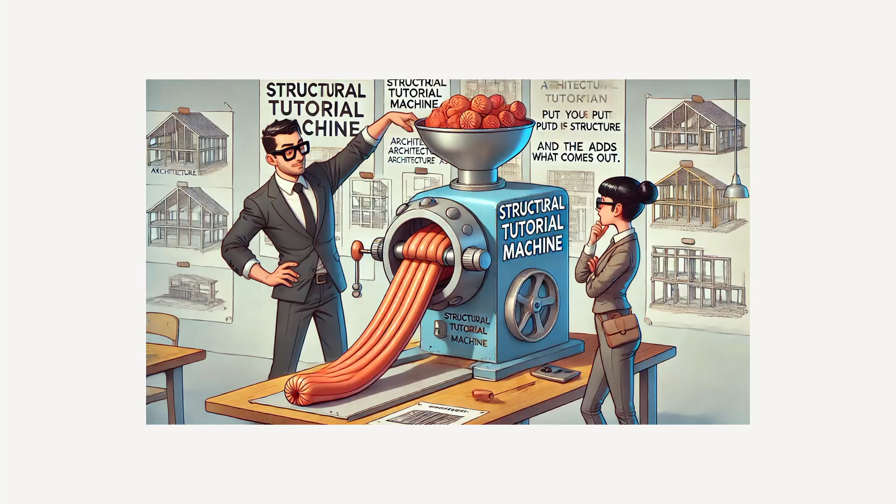We talked a lot about using less, reusing material, circular economy. And one way is always teach. I've taught for 25 years, mainly at the Bartlett. It can be a bit like a tutorial sausage machine where you have to sit down every 5 minutes with a new idea, but it can be really creative.

This was at a different university in London where we were using homegrown timber - softwood, hardwood, OSB, and reclaimed timber - in four chunks of buildings. This is working with an architecture practice called Material Cultures, who are trying to pioneer and teach people about low carbon material.

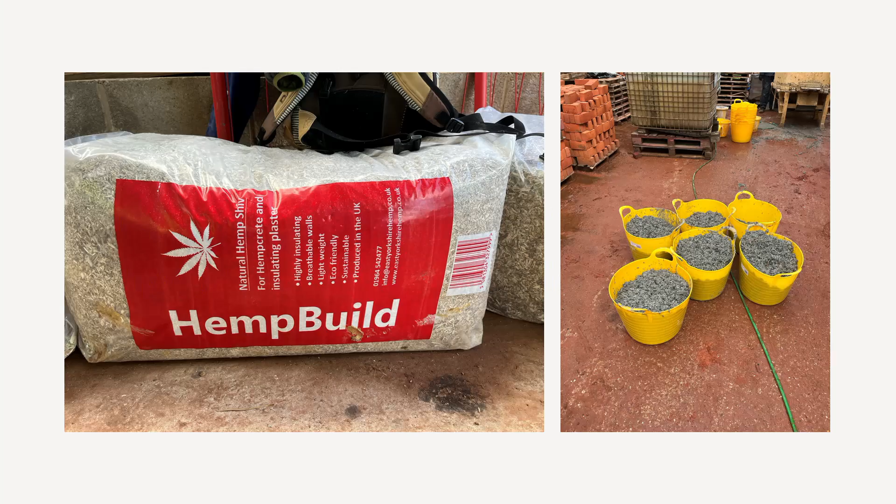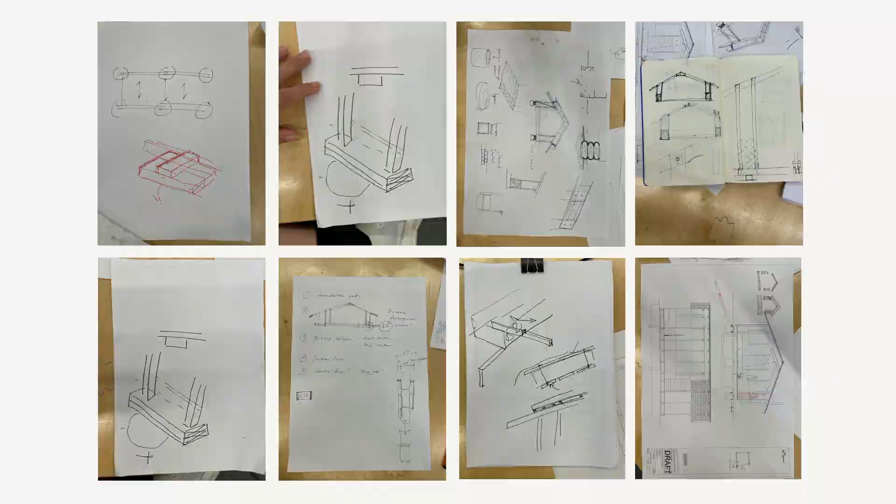How do we build really low carbon buildings in the UK, in our case using homegrown timber? This is a seed store that might eventually become some housing, a housing typology, again working with Paloma from Material Cultures. How do you summarize a design in about 3 sketches and still leave time to do other things?

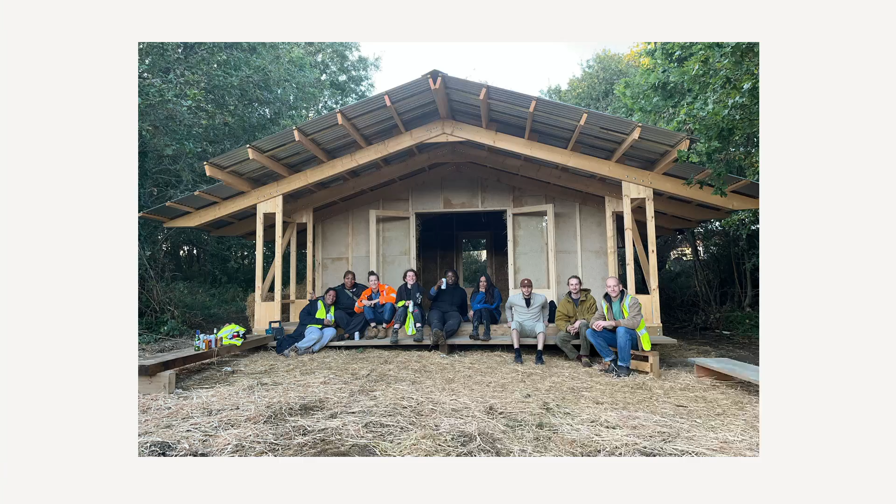This thinking is something we apply to everything we do, and if we're doing something high tech, what we're trying to do is take the challenge of using something weird - whether it's a very thin tube, a very weak material, or a very fragile thing. I think we're engineers, we can figure out how to make this stand up if we're brave enough.

So I don't think sustainability is enough, and we talked about that in this conference - again, actually regenerative design, repairing the damage we've done. This isn't as snappy as the previous point, but I'm still working on that.

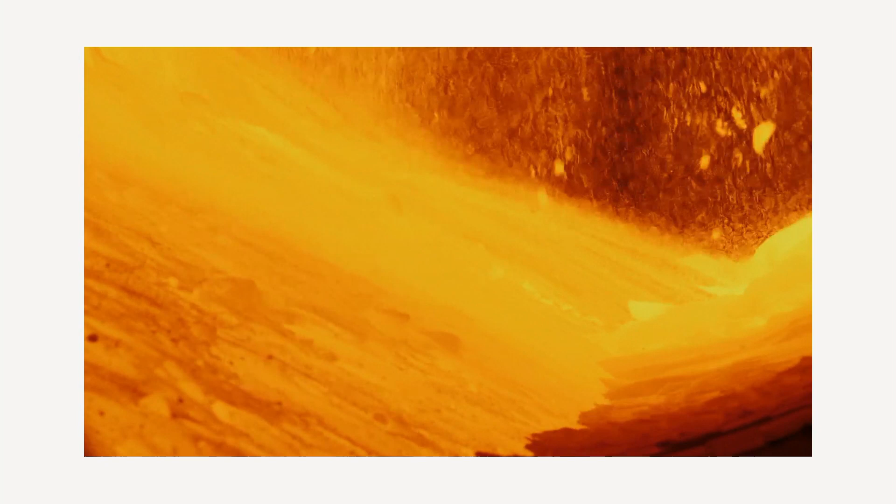I'll leave you with this: there are 2,500 cement kilns in the world. If we can shut a few more of these down by doing more with less, using these materials, thinking a bit differently, then we might be some of the way there. So that's all I've got. Thank you.

I just wanted to make the point - somebody asked me earlier if we had any advice for young engineers, and I wanted to highlight some of Tim's wonderful work here and some of the stuff Neil showed us yesterday. In the Caribbean, we often see mega projects all over the world and think we'll never be able to work on these massive projects. But you can see from some of Neil's work, and a lot of the projects we've seen here, these are things we can do in the Caribbean too, as architects and engineers, with the right level of creativity, thinking, effort, and Rhino and all the technologies we have. So it's all up to you now - there's no bounds, no limits. It all exists in the world, it's all been pioneered and refined by people, and it's so easy to pick up. It really is - it's all just the limit of creativity, what you want.